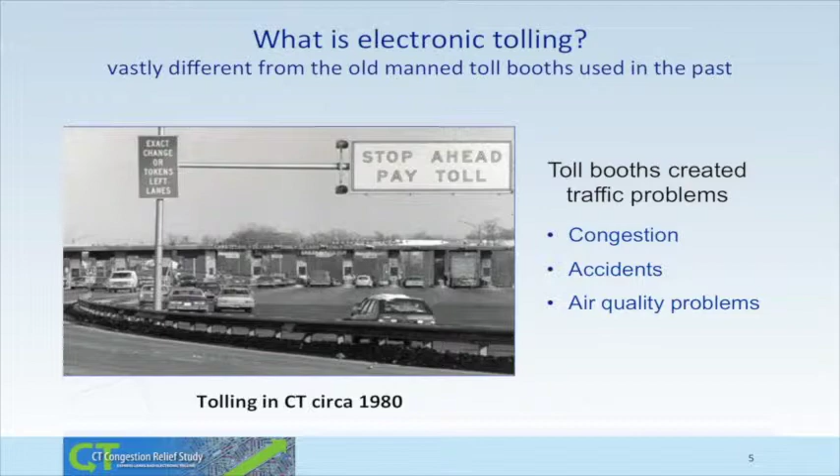The old toll booths that you used to see on places like the Connecticut Turnpike were barrier tolls set up completely across the highway. People had to actually stop, pay a coin or token to get through the toll barrier. That itself caused tremendous congestion, backups at the toll booths, which in turn led to a lot of accidents. Accidents were in fact the final reason why Connecticut decided to get rid of the tolls after one particular horrific accident in which there were about 7 fatalities as a result of a tractor trailer running into the back of the queue. It also caused air quality problems.

We need to dispel that image that we have from 30 years ago, because the technology and the industry has changed dramatically in the last 30 years. If we're going to be doing tolling in Connecticut, it will not be with manned toll booths. It will be all electronic forms of toll collection.

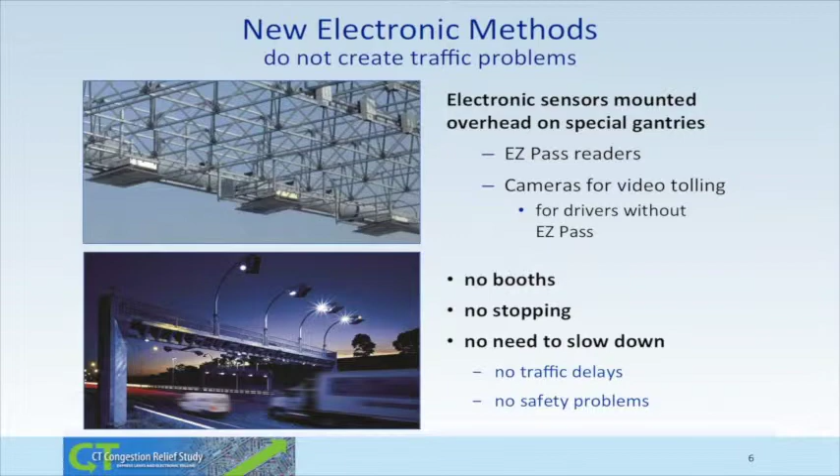As the slide here illustrates, those EZ Pass readers or electronic toll tag readers are mounted overhead on a gantry that spans the entire width of the highway, so there's nothing actually standing in the highway itself. As a result, and you can see on the bottom photo there, traffic does not have to stop. It doesn't even need to slow down. Those EZ Pass readers are capable of reading the EZ Pass even at speeds of 60, 70 miles an hour. So really, this is something that does not interfere at all with traffic flow or pose any safety problems, unlike the previous generation of toll collection methods.

The more important piece is not so much the tolling. Tolling is the method in which you collect the tolls. The congestion pricing is the important piece in terms of being able to achieve some measure of congestion relief. And basically it does that by trying to manage demand during the peak period of use. The way it accomplishes that is that it charges higher toll prices, higher toll rates during the peak traffic period in an attempt to really encourage drivers to shift to something else, either shift to a less congested time of day, shift to less congested routes, in many cases shift to transit, or increasingly in a lot of the new tolling projects that are instituted across the country, shift to other lanes on the highway.

This is a concept that you'll hear a lot about today. It's a concept called, more generally, managed lane approach to congestion pricing. It's probably better understood as the notion of having express toll lanes. Think of the HOV lanes being converted to something that you're paying a toll for rather than just having to have a minimum number of occupants.

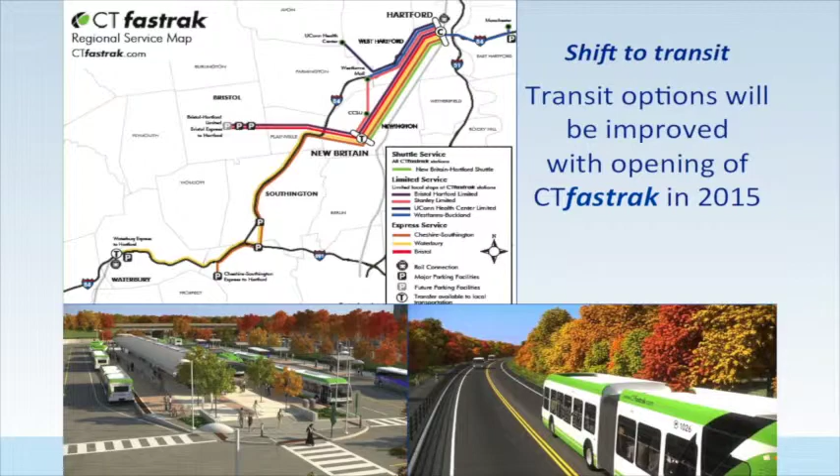The other aspect of this that's important, and in this particular case becomes a new opportunity, is one of our goals is to shift people from the highway to transit. With the opening of CTfastrak less than a year from now, we'll have a fixed guideway service where the buses run completely free of normal traffic on their own exclusive right-of-way, parallel to I-84. So we think it's going to be a great companion piece to anything we might put in place in terms of congestion pricing on I-84, and it will provide opportunities, even today without the tolling, for quick, reliable transit trips into Hartford from some of the outlying suburbs.

You have a number of general purpose lanes. Drivers can continue to use those free of charge, no toll applies. But in some cases, communities have built a couple of new lanes that they operate as express toll lanes. In order to use those express toll lanes, you have to pay the toll.

Drivers may not use it every day, but as a technique it's growing in popularity, in large part because drivers like the option of having a choice on those days that they need it. They may not use it every day, but on a day they have a critical appointment, are running late to pick up their kid from childcare, or have to be at a conference at a particular time, those are the days they may choose to pay the toll and use the express toll lane.

More than the popularity in terms of support from drivers who like having that option is the fact that this has been a widely proven and effective tool for providing congestion relief and congestion management in a lot of parts of the country.

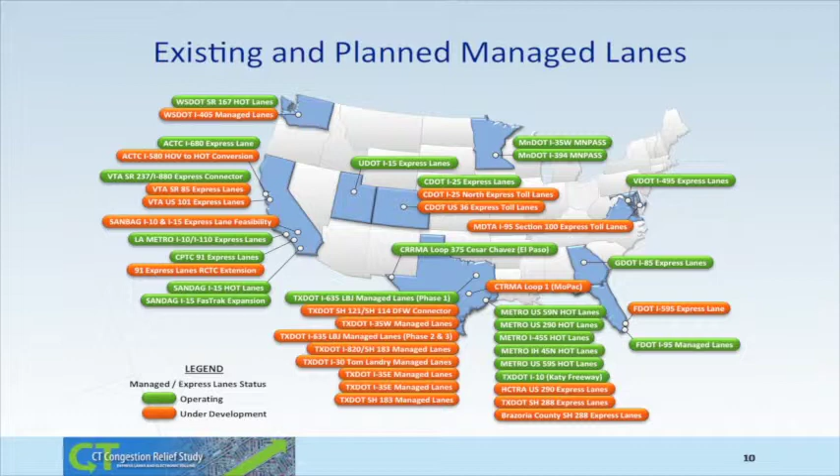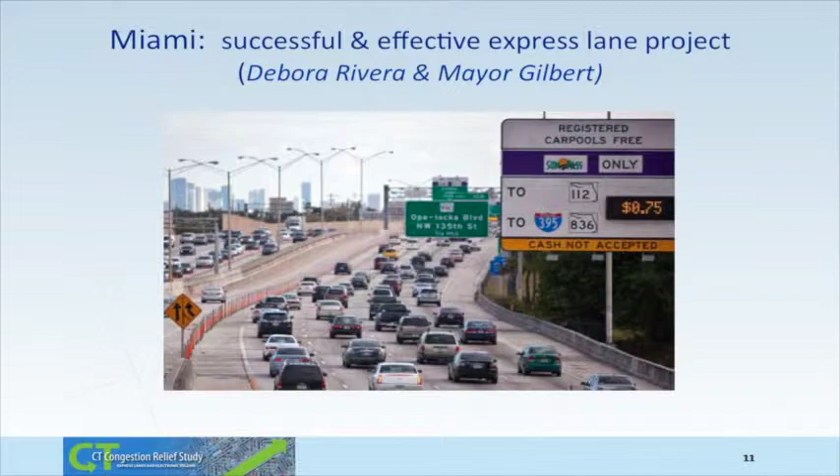One example, and one of the most successful examples of express toll lanes, is Miami, I-95. We've actually got two members of the out-of-state panel today, Debora Rivera and Mayor Gilbert, who will be speaking to that project. Some of the results they gained were simply astounding in terms of the amount of congestion relief provided, and I think Debora has the numbers she'll share with you in terms of travel speeds before and after.

I'll then switch gears here and provide more of an overview of I-84 and the problems on I-84. Those basically consist of the fact that we've got a very aging piece of infrastructure, and it's very costly to replace, and from DOT's perspective, becoming increasingly costly just to maintain.

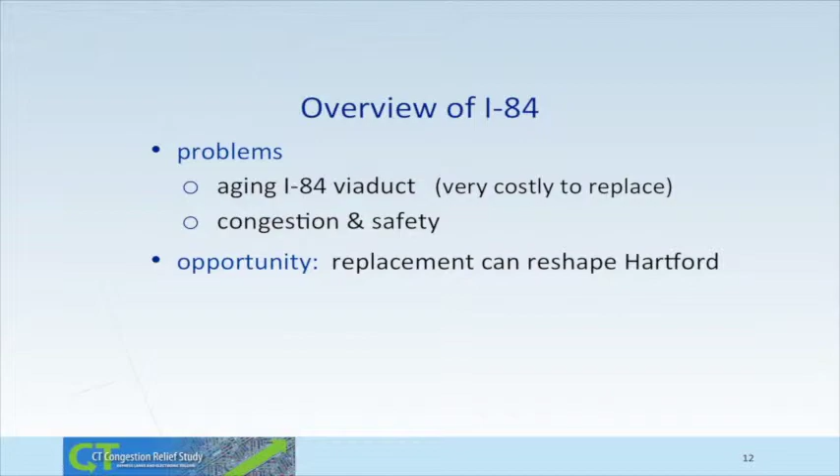It is also a facility that has problems with congestion and safety, very high accident rates, in part related to the amount of congestion and bad operations design out there today. We'll talk about that, but we also feel, despite the problems in the corridor, there are some special opportunities.

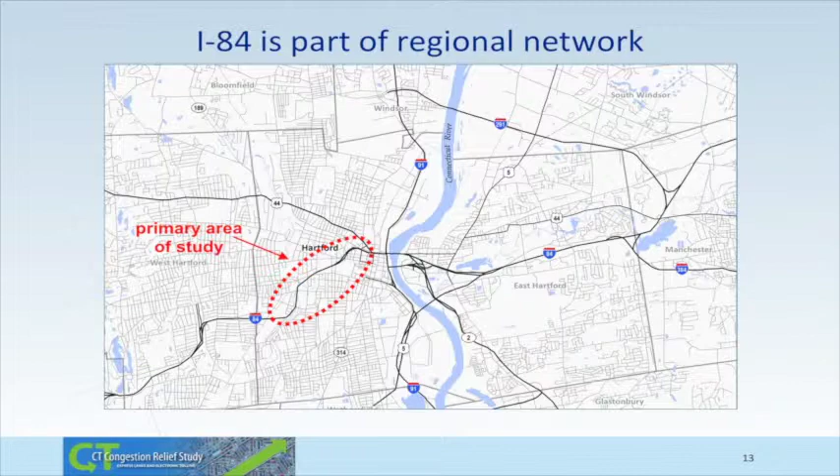It's I-84. It shows the study area in detail here, and it shows it also in relationship to the rest of the freeway system. In Hartford, you can see we have basically a radial freeway system with I-91 and I-84 intersecting right in downtown Hartford, which is part of the problem we experience on I-84.

The area of interest, which is the focus of the ongoing planning and design study for the replacement project, is shown here in the shaded area. Most of this is on structure, and it's at least three-quarters of a mile long. It's 50 years old, heavily congested, and prone to safety problems.

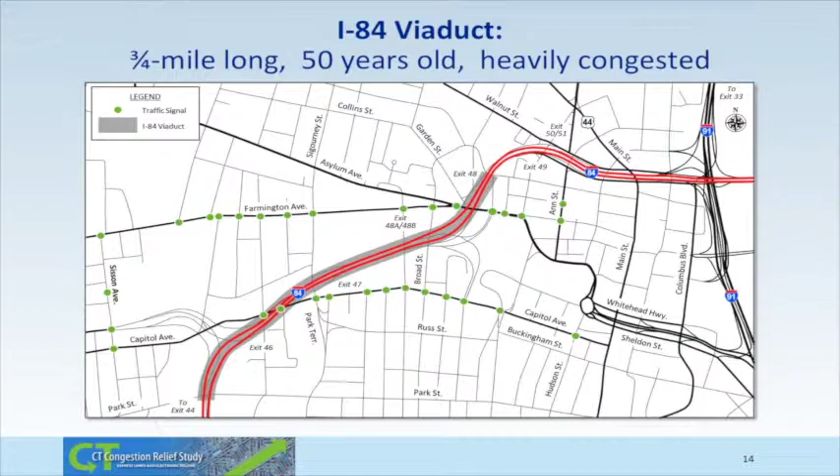The department basically understands at this point that we're going to have to do something to replace that. It was built in 1965, and we've been running with that for 50 years. At that 50-year mark, we've really exceeded the normal expected life expectancy, which is why it becomes so expensive to keep in good operating condition.

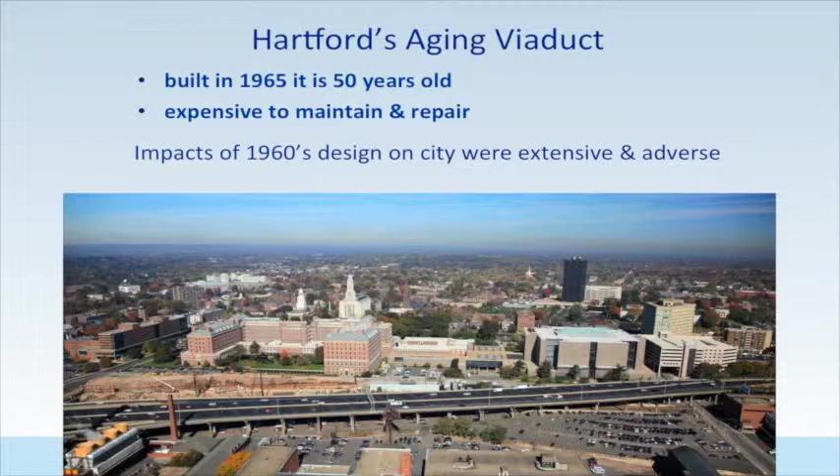The cost of maintaining that facility and repairing it grows every year, and there's only so much we can do. So really, we're going to have an opportunity here, now that the department is recognizing it has to do a replacement out here.

That same facility and its physical presence has also had another impact, on the community of Hartford itself, and those impacts were mostly negative and extensive. It consumes large amounts of land, and it divided neighborhoods.

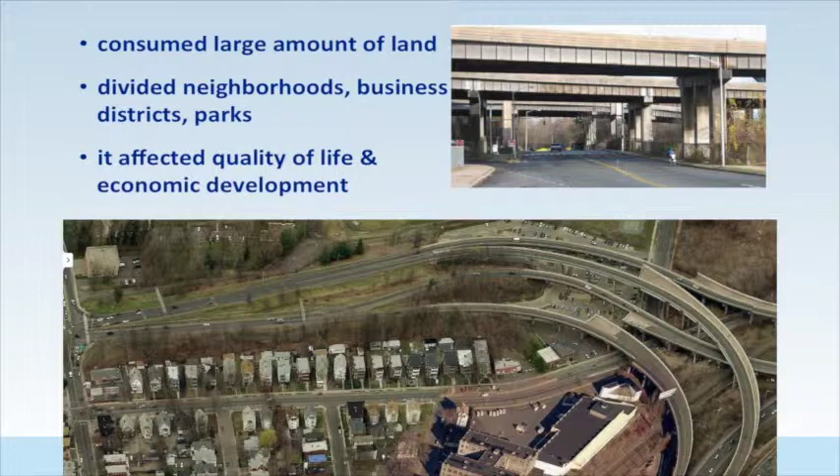It divided business districts, including the central business district, and it actually, in some cases, divided parks within the city of Hartford. It certainly affected in a negative way the quality of life for residents of the city, and I think it also helped slow economic development in the city over the long run. So there's a lot of negatives associated with the existing facility. We think we can do better moving forward.

We also have another reason to take a look at this facility. It is by far Connecticut's busiest freeway. It may not be its most congested, but it's its busiest. It carries about 175,000 vehicles a day, which is about 15 to 20,000 cars a day more than what we see on I-95. On a regular basis, and I think people probably experienced some of that this morning, we see traffic jams of about 6 to 7 miles in length.

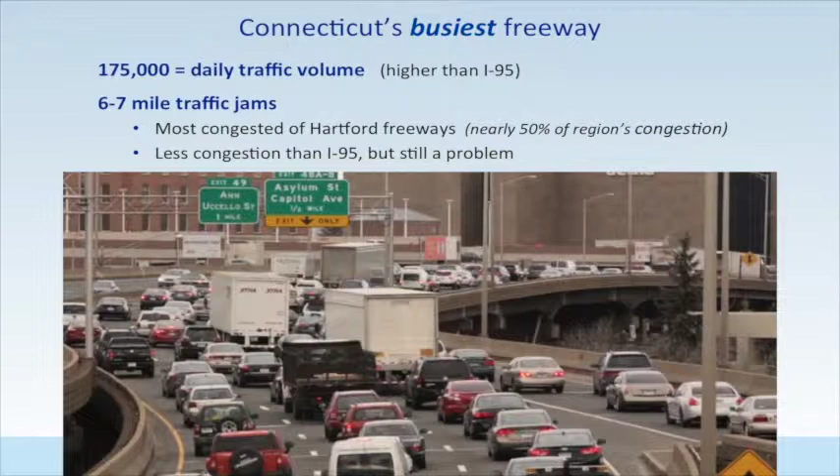Of the corridors in Hartford, this is our most congested corridor. It's a little less congested than I-95, but it's still significant congestion, as this next diagram illustrates. This is a time-space diagram that shows through color coding where, when, and how severe congestion is in the corridor. Let me give you a brief idea.

The top part of the slide represents the westbound direction, or outbound from downtown Hartford towards West Hartford. The bottom half represents the eastbound or inbound direction, and along the bottom we have key landmarks that will give you a guide as to where you are in the corridor. We're probably looking at about a 10 to 15 mile section here, starting with Route 9 all the way out on the West Hartford, Farmington town line area, all the way through West Hartford.

You have the city line represented there. You have Sigourney Street, which is one of the major exits off of I-84. And then you see I-91, which is the interchange with I-91 right in downtown Hartford. The diagram actually extends beyond that, across the river into East Hartford.

The other thing you need to understand is the timeline, represented on the vertical axis. You have 6 a.m. to 6 p.m. for the outbound direction listed on the top side, and on the bottom half you also have that same timeline from 6 a.m. to 6 p.m. in the evening.

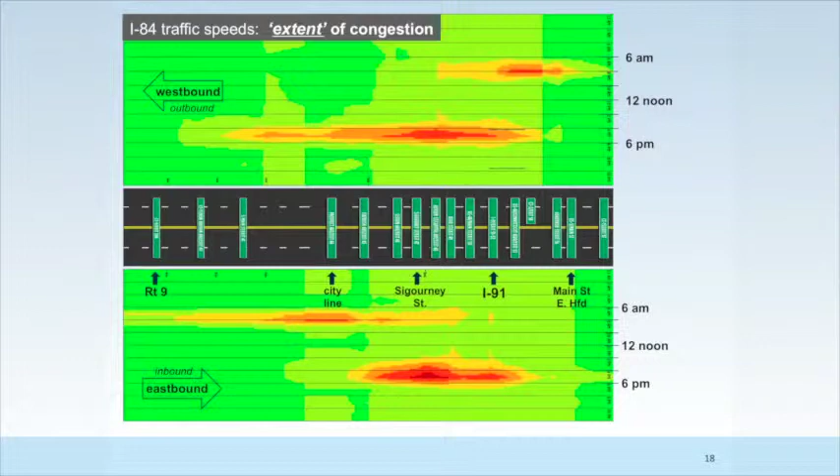And to help you interpret this, and I apologize for the complexity of the diagram, but it's also a very powerful graphic illustration of what happens. We're showing first the AM condition in the inbound direction. We have congestion extending over 6 miles in length. Also in the morning, in the outbound direction, we still have 3 miles of congestion.

That brings you out to about the Sigourney Street exit, which is the last of the major employment exits within Hartford. So part of that is people getting to work in the Asylum Hill area that are part of that congestion.

If you look at the afternoon, the problem actually gets significantly worse. In the outbound direction, we're seeing traffic backups of 6 to 7 miles in length, a little more severe with the amount of red that's shown there. But we're also seeing significant congestion in the inbound direction, about 4 miles in length, with a lot of very severe congestion showing with the very deep red colors here.

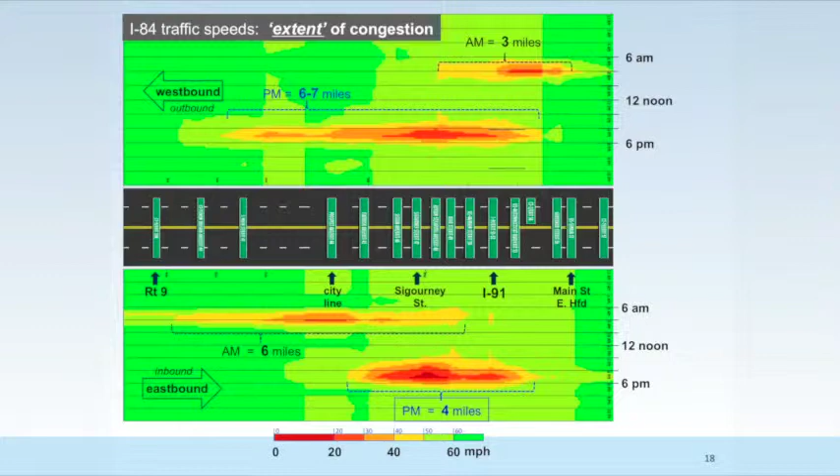The other aspect of this is just how long, not just the geographic length or extent of the congestion, but how long the congestion lasts. We're seeing in the afternoon congestion, in both cases, congestion that lasts about 2.5 hours, maybe in some cases 3 hours. Much less severe than what we saw on I-95 yesterday, which is 4 to 5 hours, but still very frustrating if you're one of those that are stuck in traffic.

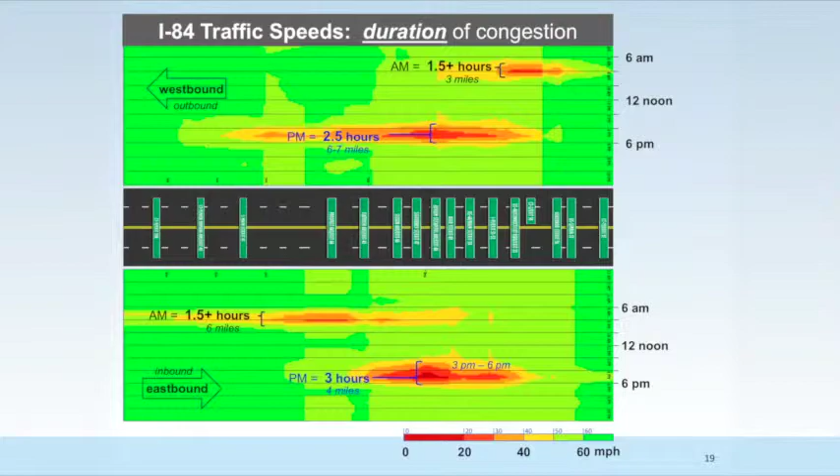In the morning, congestion is a little less significant. It lasts only about 1.5 hours, both in the inbound and outbound direction. So that gives you a very graphic illustration of what congestion looks like, where it occurs, and how severe it is within this particular corridor.

Despite the problems of congestion, safety, and an aging piece of infrastructure, we also really have an opportunity here. We've made a determination at DOT that we're going to do something to fix that viaduct, possibly replace the entire viaduct. That really provides an opportunity to do it differently this time, to undo or correct some of the mistakes we made with the design from the 1960s.

There's an ongoing study being done by the Viaduct Replacement Study Team that suggests there are probably some design aspects of the facility that will allow us to make this a much less intrusive type of design, placing much of the highway below or at grade. More importantly, one of the goals of this project is simply to shrink the footprint of the highway so it's not as wide and doesn't consume as much land. All of that is being evaluated in the study that is ongoing now.

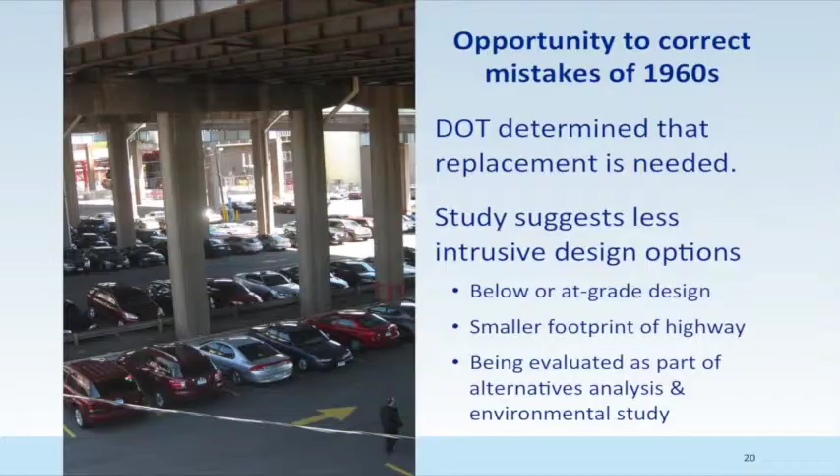The challenge that presents is you're being asked to shrink the footprint of the highway, while at the same time being asked to provide some measure of congestion relief. How do you do both? It's usually counterintuitive—your usual reaction to providing congestion relief is to provide additional lanes. In this case, we're not going to have that luxury. So I think there are two opportunities to actually achieve both goals here.

The first is represented by the design team, who have already begun looking at the number of interchanges, the operational problems, the left-hand entrances, and the length of weaving that occurs and disrupts traffic flow. Through operational improvements in a better design, they think they can actually achieve a fair amount of congestion reduction—not eliminate it entirely, but make a significant improvement.

We also believe that congestion pricing, if that's brought in as part of the solution, can achieve even more congestion relief within that corridor. It's worked well in other places, and you'll hear some of those examples today.

We also believe it is a good investment to make because it provides for sustainable capacity. If we're going to make an investment of $3, $4, $5 billion in a replacement for the I-84 viaduct, we don't want that capacity to be totally absorbed within the first few years as traffic grows. The congestion pricing provides you with the opportunity of managing that demand and keeping it manageable even as population, employment, and traffic demand grows.

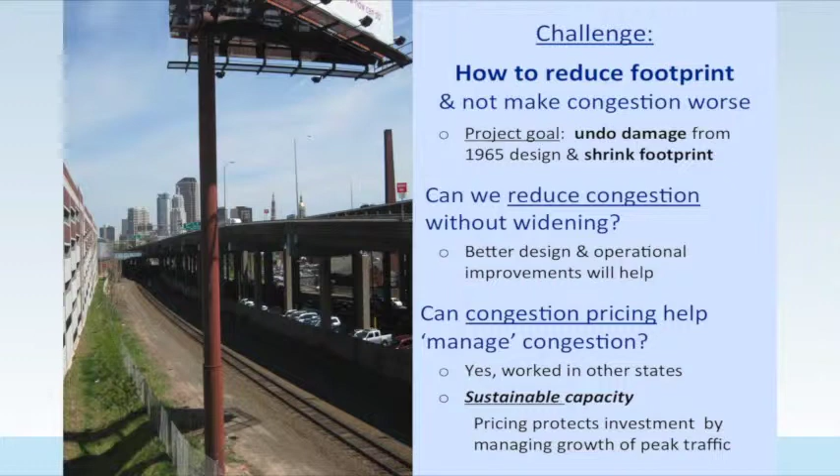You just focus on keeping flow moving well during that peak period by adjusting your prices. So we think that is an opportunity—it's also an opportunity in terms of congestion pricing to possibly help pay for this project.

The cost of replacement is going to be about $3 to $5 billion. That's going to be extremely difficult to fund today, and it's getting even more so as we move forward into the future. Federal funding is uncertain at best, and we also know that over time it's been flat or shrinking.

Whether it's state or federal, the primary revenue source is the gas tax, and the gas tax is not sustainable. It might provide a reasonable amount of revenue today, but as we increase the fuel efficiency of automobiles—and that fuel efficiency for the fleet is expected to double within the next 10 years—that's half the amount of gasoline that'll be used, and half the amount of gas tax that can be collected. So we know the gas tax is not sustainable.

We're probably not going to be able to rely on standard state and federal funding sources to provide all the funds we need to move this project forward. One of the things we'll be looking at as part of this project is whether or not congestion pricing can provide a significant source of revenue to help finance the project. So we really have two goals with that in this particular case.

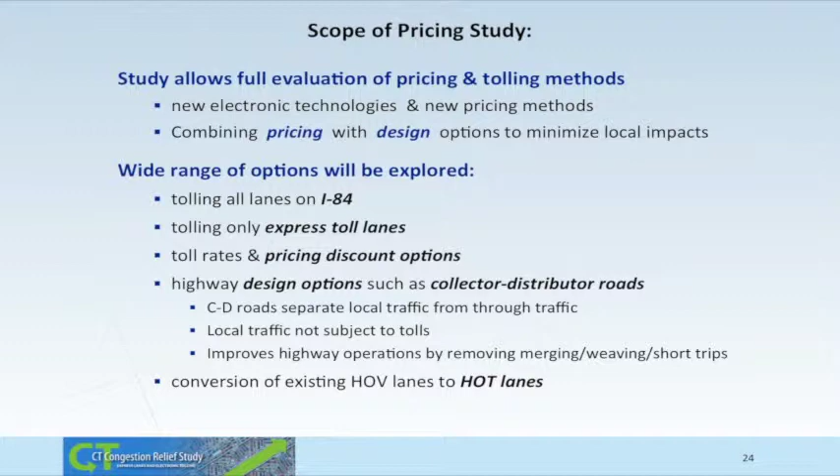We'll again take a close look at what's being done in terms of the design of the new facility, in terms of collector distributor roads that may be part of that, and how that affects residents as well as employees of the city, as to whether they are forced to or not required to pay a toll as they go to and from work.

And then finally, we're expanding the study a little bit beyond just the I-84 corridor. We're going to look at some of the existing HOV lanes in the region and try to determine how much congestion relief we could achieve on those facilities if we converted them to HOT lanes, or express toll lanes, if you will.

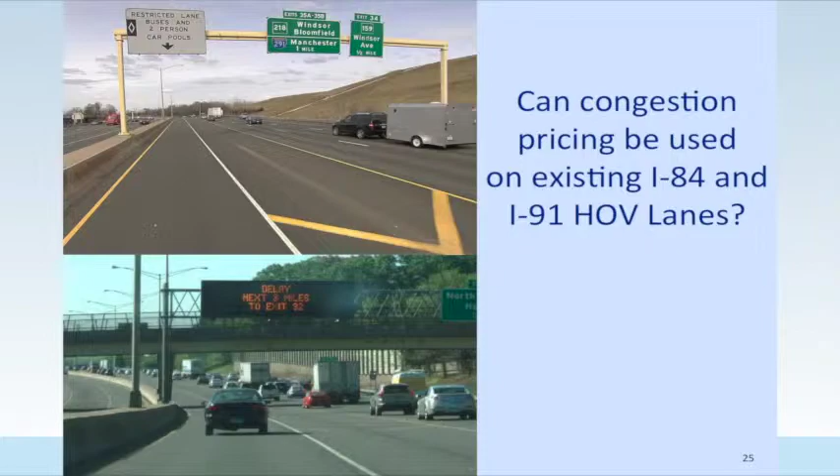Just to give people in the audience, as well as our out-of-state panelists, a little bit of background about the existing HOV lanes: they're currently restricted to vehicles carrying 2 or more people. It used to be 3, but it was dropped to 2 because there wasn't a lot of use on it. It exists on 2 of our highways, I-84 and I-91.

They are configured in a way that we think would make it fairly easy to convert to HOT lanes, because of the wide separation between the HOV lane and the general purpose lanes. They have separate entrances and exits, and I think just as importantly, they have excess capacity - they're only used by about 600 to 700 vehicles a day during the peak hour. That gives plenty of room to put additional traffic in there.

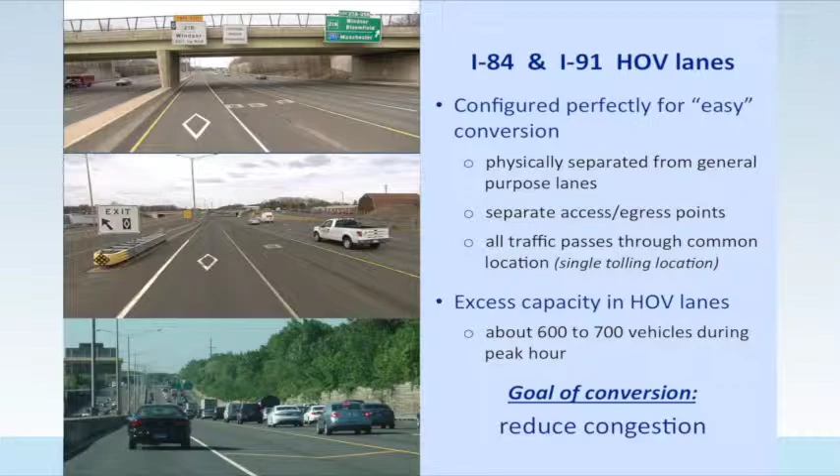That traffic would include single occupant vehicles who are willing to pay a toll so they can bypass some of the congestion that exists on I-91, which we think will also have benefits for the rest of the people on I-91 - you'll hear some of those stories this morning. These are where the HOV lanes are located today, so we'll take a look at converting those to HOT lanes. Carpools would still be allowed, but we'll also allow people willing to pay a toll to use those facilities. We'll take a quick look as to whether an express toll lane makes sense on I-84 on the other side, which is part of the focus of our study, and also look very briefly at whether we can connect all of those HOV lanes and operate them as a system.

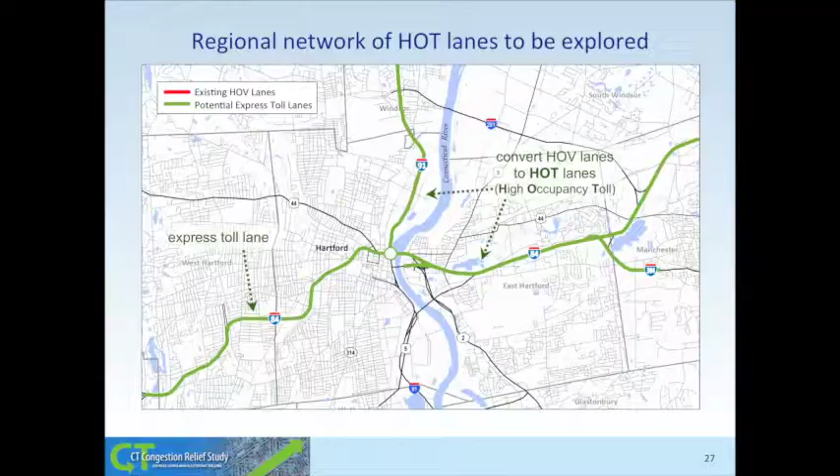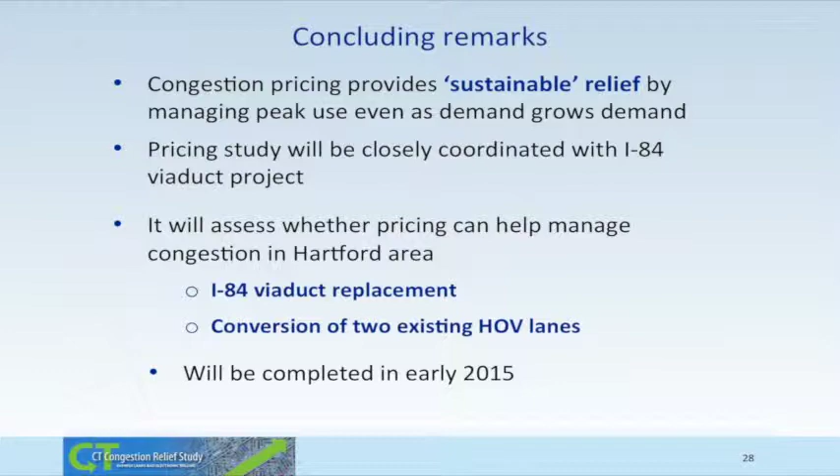So with that, I'll conclude my remarks and reemphasize that congestion pricing is effective and, more importantly, provides a method of sustainable relief by managing peak use even as demand grows. We're coordinating this study very closely with the I-84 Viaduct project, and as we move forward, we'll be assessing whether pricing can help us achieve a significant amount of congestion relief in the corridor. We expect our work to be done in the early part of 2015. So with that, I'll turn it back to Arnie.